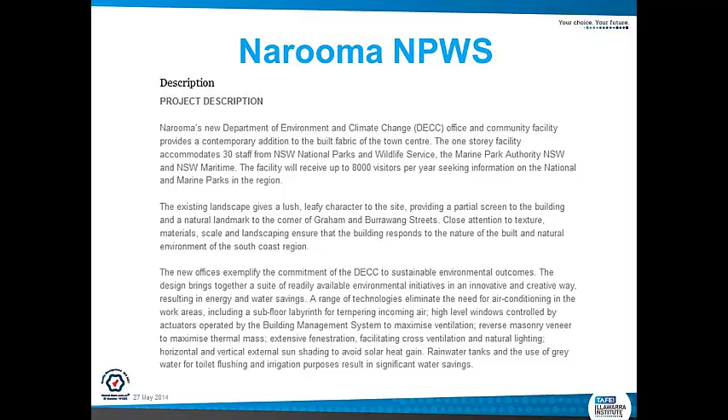The Narooma National Park and Wildlife Office, built on Burrawang Street some time ago, actually got an award, and it was built by Edwards Constructions, a very reputable medium-sized construction company.

How does this building comply with the NCC? What are we going to do to ensure compliance? We're just going to pick on a couple of items: mainly the subfloor ventilation, that is the Gabion baskets, with regards to the deemed-to-satisfy provisions and the alternative solutions.

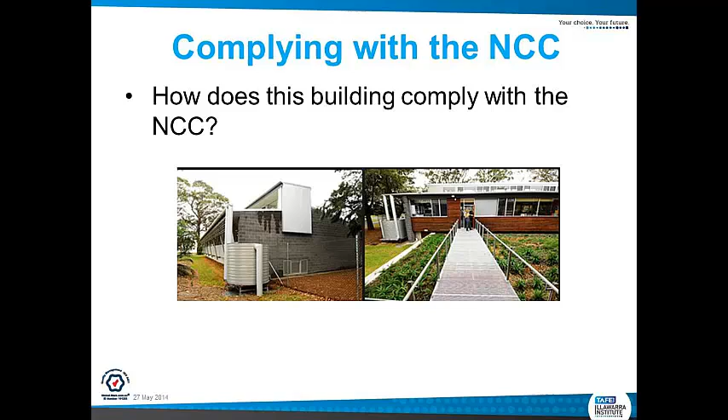Step one, we need to determine the classification. Nice and simple: Class 5, an office building used for professional or commercial purposes, which excludes buildings of class 6, 7, 8 or 9. Alright, so we know that.

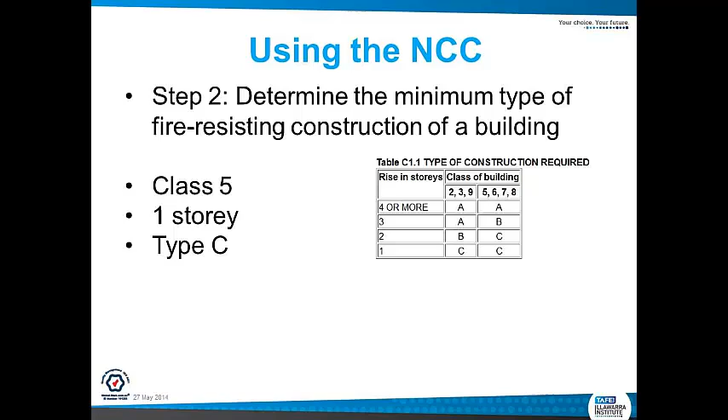Let's move on to the next step. Step 2, determine the minimum type of fire resisting construction of the building. So it's a class 5, one storey, type C. For this presentation we're not going to delve into fire rating, but that's just so you understand how to work out what type of fire resistance is for the building itself.

We need to select a construction method or design. For this instance we're going to use the National Park and Wildlife Office's structure, their portal frames. Now how do we deem compliance?

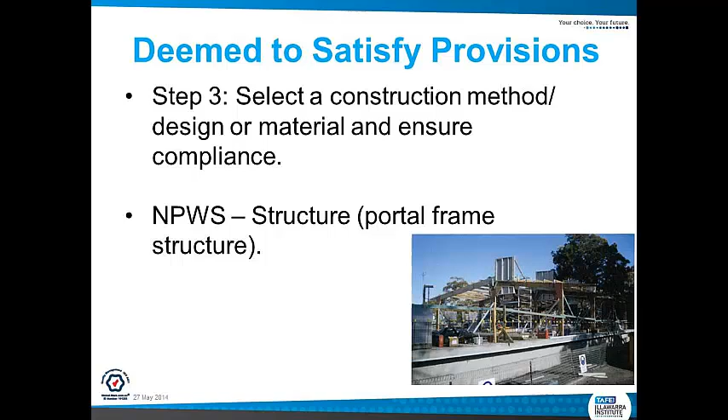We refer to the deemed-to-satisfy provisions. I hope that makes sense, boys, we've gone through it enough. If you refer to Volume 1, the structural provisions, BP1.1, you go through all those steps, and that will ensure we meet compliance if we build it.

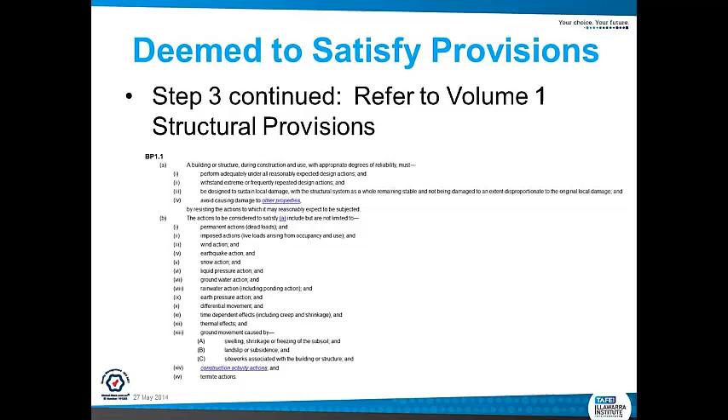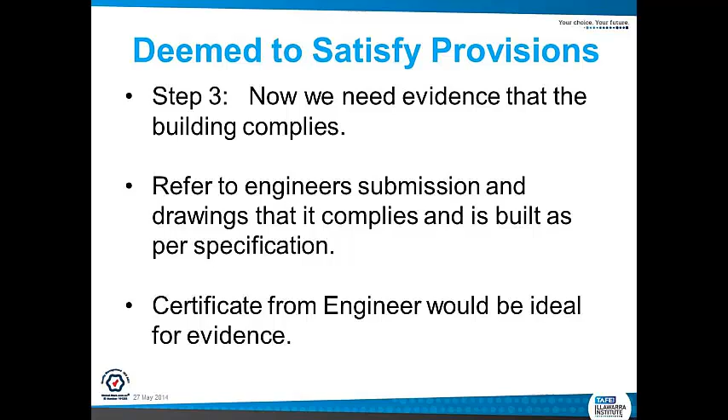If we build it, how, boys? As per what? Let's think about it. As per the plans and specs. So we need evidence that the building complies, so refer to the engineer's submission and drawings that it complies and is built as per spec. Then all we need is the engineer's sign off, and then our certifier will say, yep, as per compliance, as per the BCA, happy days.

Okay, what if we want an alternative solution? Next step: we need to select a new design from this job and ensure compliance. So this one, I'm going to pick the Gabion baskets with the subfloor structure for the ventilation.

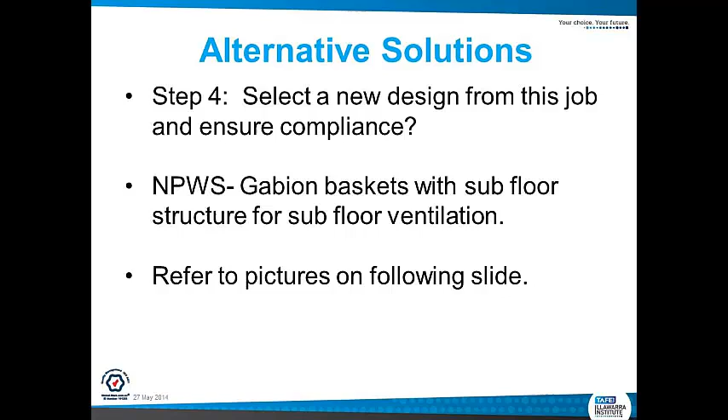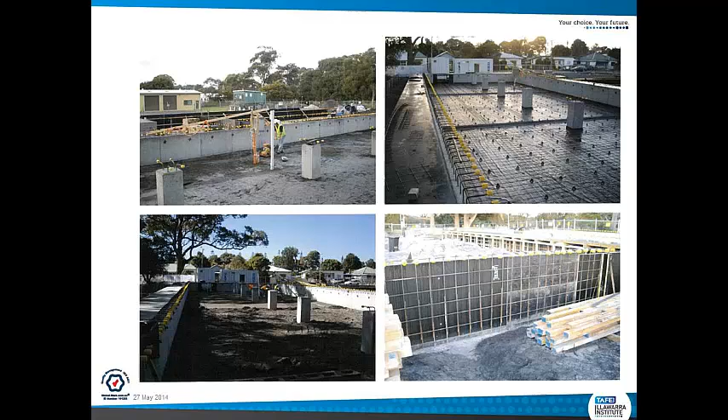Now just so you can get an overall picture of it, have a look at these next slides of what it looks like. That's a subfloor. We had a slab with perimeter concrete walls formed around, and then once that slab is poured, we have the Gabion baskets. There's the Gabion baskets, and on top of that we have the slab where the actual office is.

So there's some dust extractors at each end, and they go on and off at certain temperatures, which make it nice and pleasant for the workers in their office space.

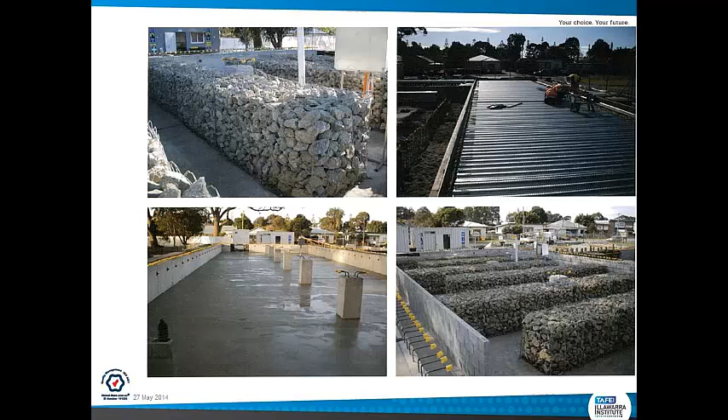So now we need to ensure compliance with the NCC. How's that done? We need to refer to Volume 1, deemed-to-satisfy provisions, and if you read through that, you notice there is no provision for the Gabion basket method within those Australian standards. So from that we need to go to the alternative solution. How do we do that?

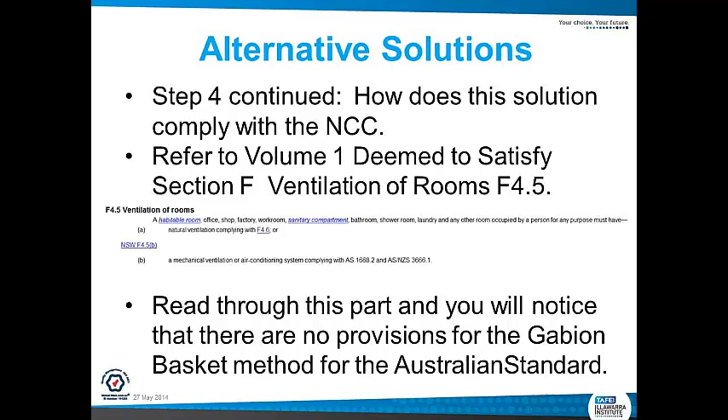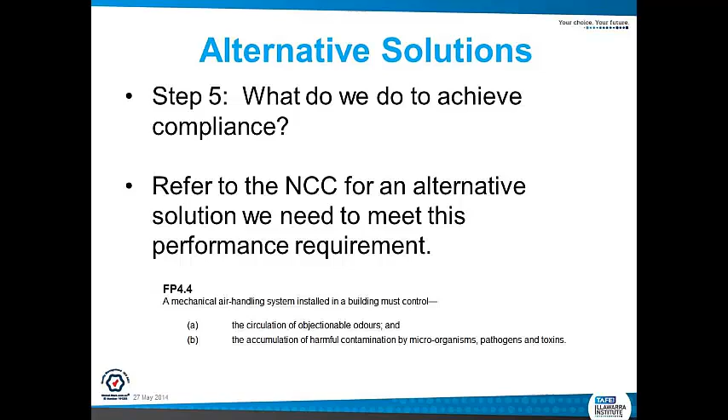Let's go back over what we do to achieve compliance. We need to refer to the performance requirements, that is FP4.4: a mechanical air handling system installed in a building must control circulation of odours and accumulation of harmful or contaminated odours.

Once we've done that, we need to look at the assessment methods. How do we achieve compliance? That's through a couple of items: verification methods, expert judgment, comparison with the DTS provisions.

So for us as a builder, we just need to say, well, who's signed this off? Is it like a company, a manufacturer? But for this instance, expert judgment was decided and complied with by the certifying authority, and that would be the mechanical engineer. They've confirmed whatever rates it is for airflow and so forth to comply, and said, yeah, go for it. As per the engineer's design, that's done. Alright, so we've complied there.

So what I want you to do now is go to the quiz on the Moodle topic using the NCC as a builder and complete it. It's an essay: I want you to look at an old job or a recent job and discuss your DTS provisions and alternative solutions. I hope that helps, guys. Have a good day, happy days.